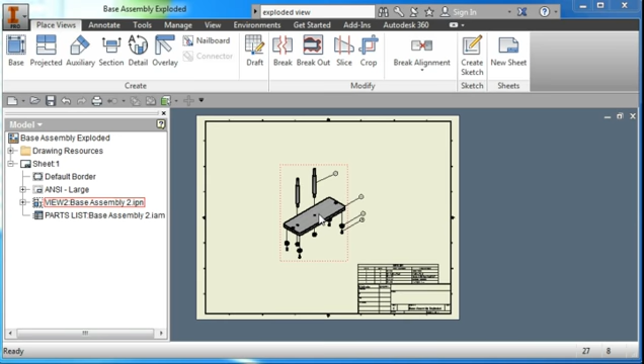I'm going to start out by going to Projects and verifying that there's a check next to my Button Maker folder. I'm going to hit Done, and I'm going to create a new presentation.

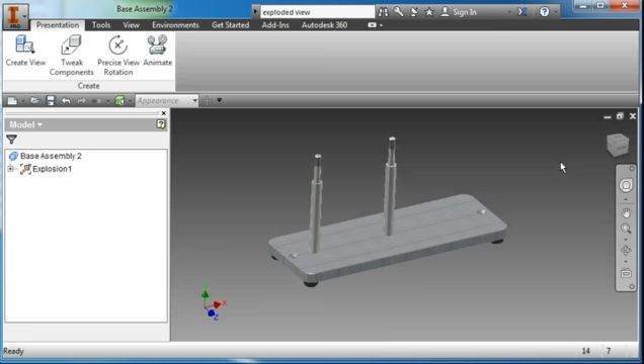I'm going to create a view, and I'm going to look for my base assembly. I'm going to select it and hit OK. There's my base assembly. So I'm going to create an ISO view of this, and I'm going to make this my new front view.

And I'm making it my current front view, for the purposes of creating a drawing later on.

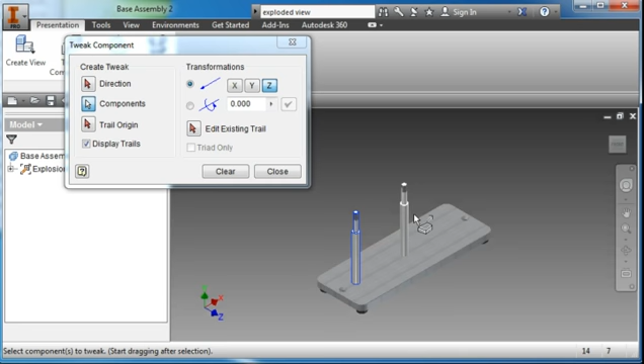So I'm going to go ahead and select the tweak command. I'm going to select some components, the two vertical supports, and then make sure I'm going to move them in the Z direction. Make sure I select Z, and I select the parts, and I can move them up. I want to lift them up so that they clear the base. When you're looking at the parts in this orientation, they clear the base, and I'm going to hit close.

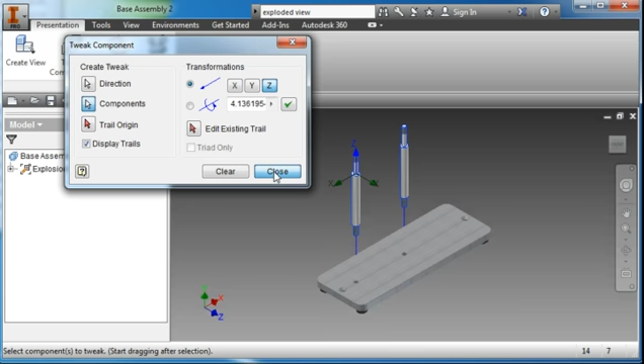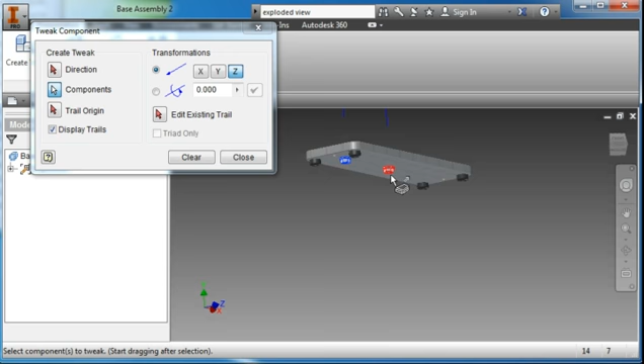I'm going to rotate the base just slightly. I'm going to tweak, I'm going to select these two hex nuts, and the direction again is going to be Z. I'm going to select them and move them in the Z direction. Go back to my front view and make sure they're located where I want them so that they're visible, and hit close.

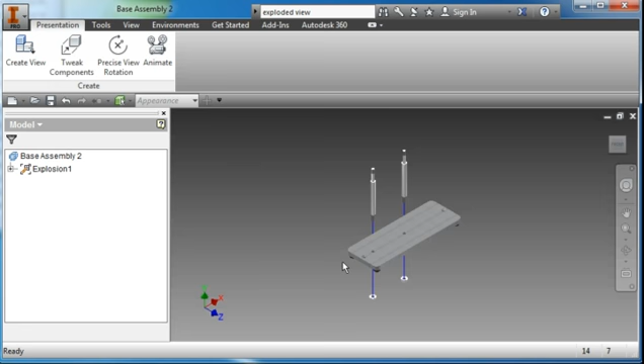Rotate my view again and zoom in. I'm going to tweak now. I'm going to select the 4 feet, and when I select them they turn blue. Make sure all 4 are selected. I'm going to set the direction to Z.

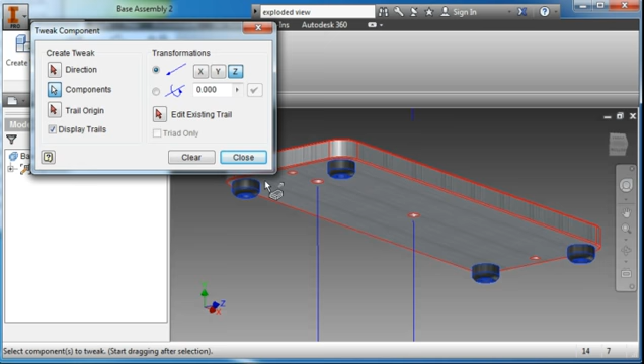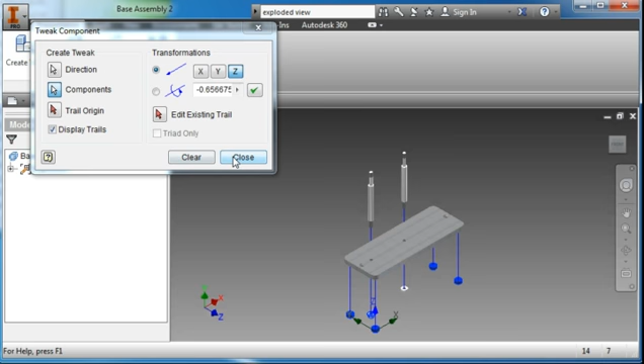And you notice as I could select a direction, move them down, go back to my front view, make sure they're located where I want them, maybe just a little bit lower. Close.

I'm going to rotate back again, and I'm going to move the screws. Go to tweak once more, zoom in, select the components. I'm going to select the 4 screws. Okay, select the direction. I'm going to select Z, and I'm going to move the screws down.

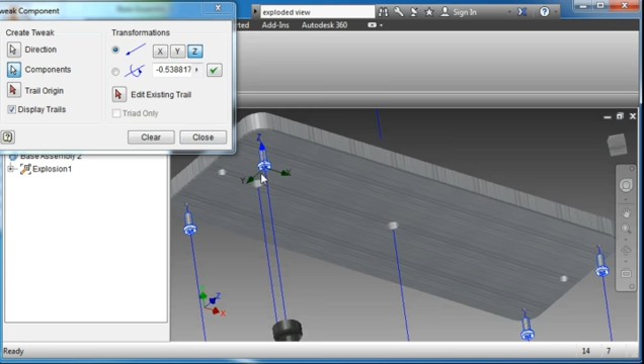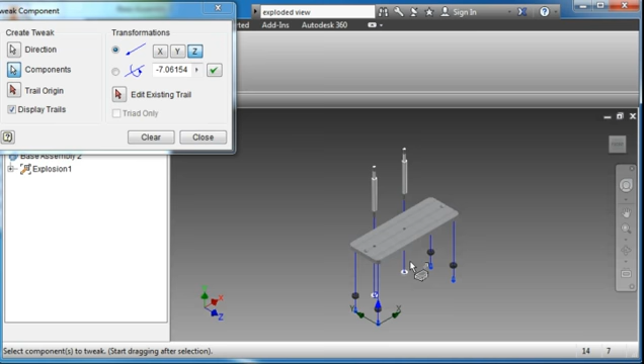I'm going to move them so that they're past the feet. Go back to my view, and they're where I want them to be. Hit close, and hit save. I'm going to save this as base assembly exploded.

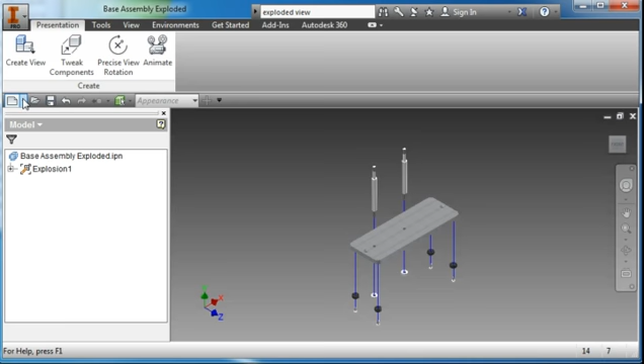I'm going to create a new drawing, and as my base view I'm going to select, make sure that I can select a presentation file. So I'm looking for IPN files, and I'm going to select the IPN file that I just created. And I'm going to set this to shaded. Set the scale to 1/2 and hit OK.

Hit escape. You notice I placed my view down here. I'm going to move it up. There's my ISO view of my exploded assembly.

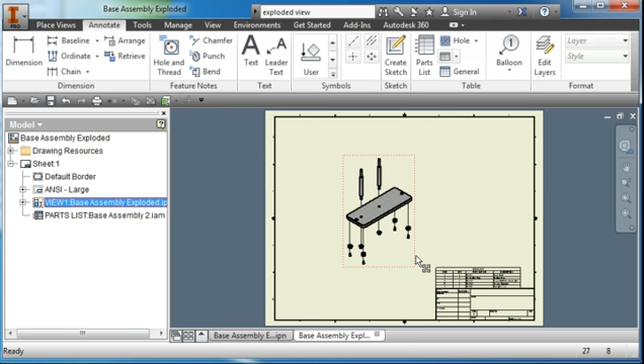I'm going to go to annotation. I'm going to create a parts list. Hit OK. I'm going to place my parts list down here. Zoom in. And make sure that you include the descriptions here. Type them in if they're not, or if they don't appear automatically.

So I'm going to go ahead and place my balloons. Select the balloon command, point, click right mouse button, continue, point to the base plate, click right mouse button, continue, point to the foot, click right mouse button, continue, and point to the screw, click right mouse button, continue.

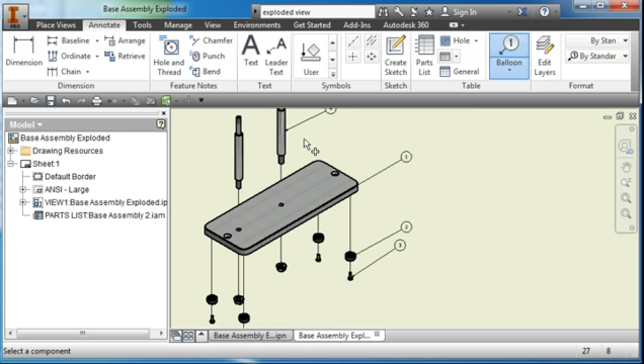I'm going to go ahead, where I have multiple locations, and designate that. I'm going to zoom in and point to this location here and type in capital X space 4. Hit OK. Hit escape, and that lets me move it.